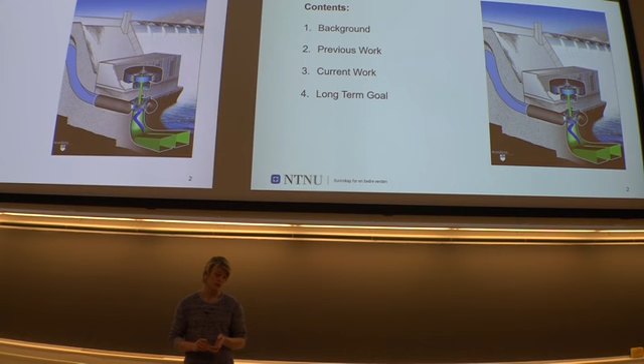So my presentation will consist of first a little presentation of the background theory and how the transients are affecting the hydropower machinery, what has been done previously related to this project, what I'm currently working on, and what are the long-term goals of what I am currently working on.

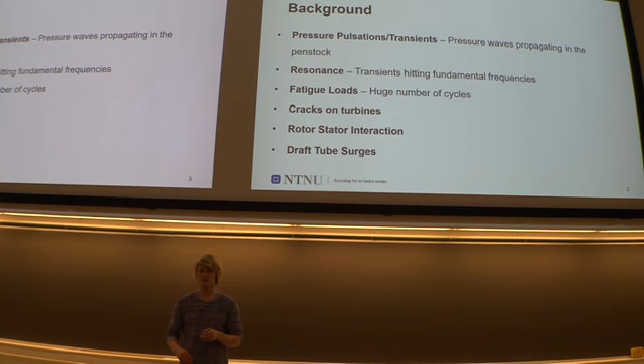So, pressure pulsations or transients are pressure waves propagating in the waterway with the speed of sound. They will have an amplitude and a given frequency. And if the frequency of these pressure waves hits the fundamental frequency of any of the structures in the hydropower system, it may cause resonance, which could have serious consequences for the system.

During the lifetime of the hydropower system, it is going to experience a high number of cyclic loads from the pressure waves or pressure pulsations. And this could cause fatigue loads in structures in the hydropower system, which could lead to, for example, cracks on turbines affecting the hydropower efficiency or eventually causing failure of the hydropower station.

So rotor-stator interaction and draft tube surges are two ways that these pressure pulses are generated. I will not go into detail, but the rotor-stator interaction is when the pressure pulses are generated between the interaction of the runner blades and the guide vanes. And the draft tube surges are pressure pulses that are generated in the draft tube where the flow is exiting the hydropower turbine.

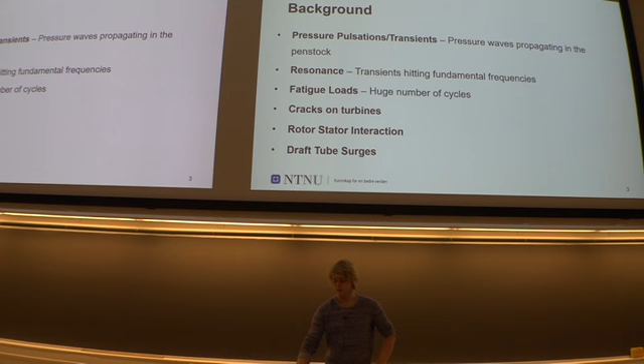So the previous work: this project is related to a hydropower station called Kvilldal near Stavanger, which consists of 4 turbines. And these turbines are connected in the waterway, which means that transients originating from one turbine may propagate through the waterways and reach the other turbines. So that makes this hydropower station an interesting research object.

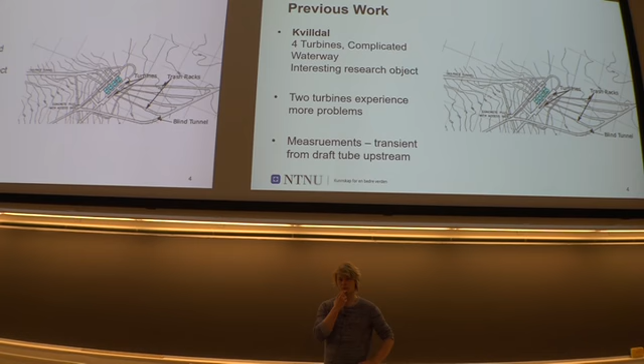2 of the turbines in the hydropower station have experienced more problems than the others, and the theory for this is that it's because of pressure waves or transients. This spring, measurements were performed in the hydropower station, and in the measurements they were able to see frequencies related to the draft tube surges upstream of the turbines. However, why some of the turbines are experiencing more problems than others was not yet determined.

What I am working on is applying CFD and numerical analysis in order to simulate this hydropower plant. I'm comparing one-dimensional methods with 2-dimensional and 3-dimensional CFD. So the one-dimensional method I've been looking at is the method of characteristics. It's a one-dimensional method that solves the wave equation using finite differences, and it is computationally very fast and efficient compared to 3D CFD, which is computationally heavy.

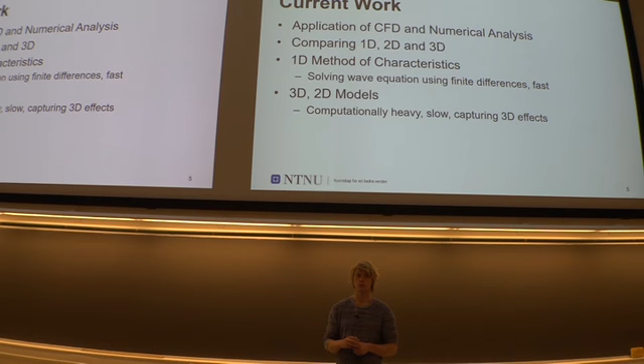When considering modeling a hydropower station with all of the waterways and the turbines, doing a full 3D model of everything is unfeasible, and then you probably need to couple 1-dimensional and 3-dimensional models in order to create a proper full-scale model to see how the pressure waves travel in the waterways and interact with the other turbines. But the 3D models are still necessary in regions where you have 3-dimensional effects.

So what I have currently been doing is simulating a water hammer. This is a pressure wave phenomenon where water is flowing through a pipe, and then it's closed at the downstream outlet. This creates a strong pressure pulse that is reflecting between the valve and the reservoir, and the pressure pulse is moving with the speed of sound, and the pressure pulse is generated because of the compressibility of the water.

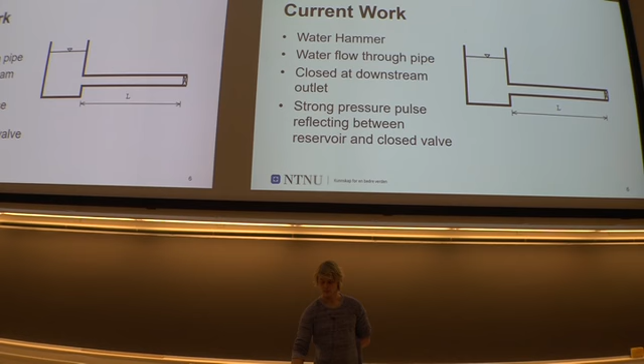And as the idea here is to couple the models, you can see that coupling models that are similar but not exactly the same could possibly cause some dubious results at the boundary where they are communicating with each other. If they are giving each other slightly wrong information, it could cause, for example, false transients to spawn in the simulation and give you bad results.

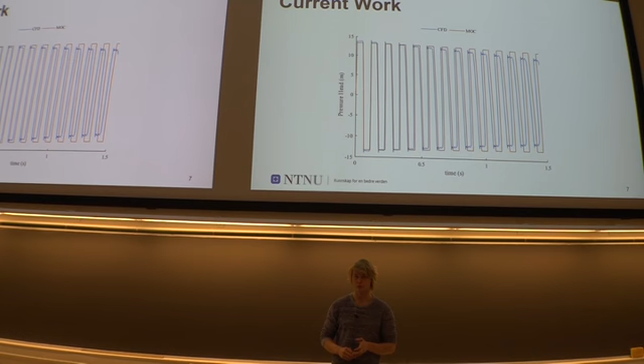The long-term goal of the project, ideally, is doing a full simulation of the Kvildal hydropower station using the theories behind one-dimensional and three-dimensional coupled modeling, and then use this to study how the transients interact with the turbines and how this is possibly affecting the system.